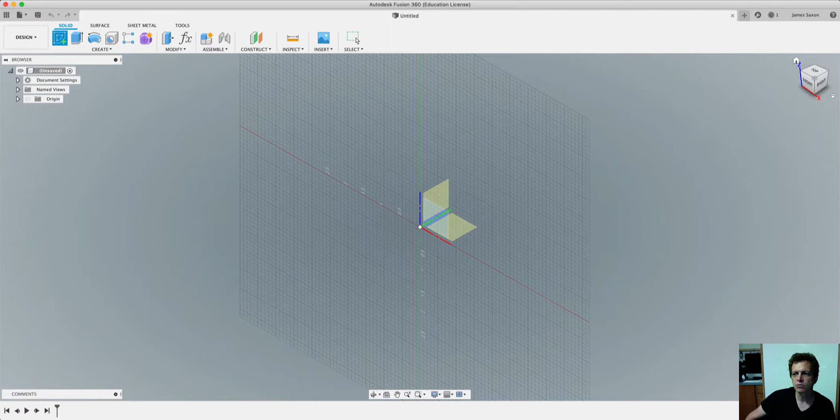So we are going to create a new sketch so that we can get into 2D mode. I'm just going to click on the front here so it's easier to see. We're going to select the XZ plane and we are going to make some points.

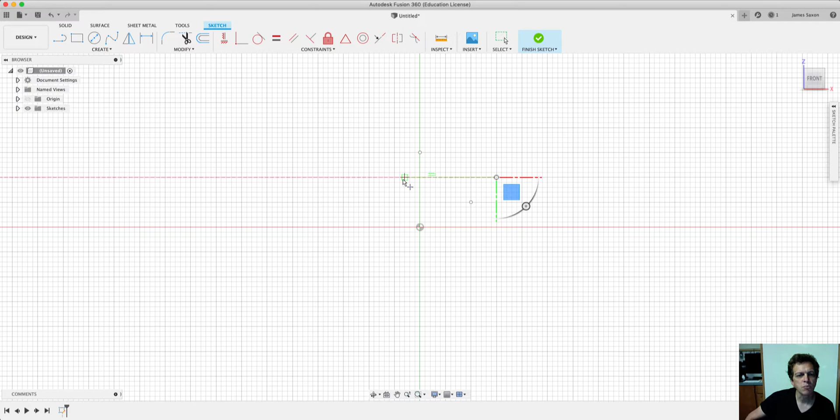I'm going to put a point here, and a point here, and a point here. Make yourself 20 points. Okay, so now that we've made 20 points, we are going to finish the sketch.

And now we're going to make rectangles. Select your rectangle, and we're going to do 10 two-point rectangles. I don't care what size they are, we'll go over that later.

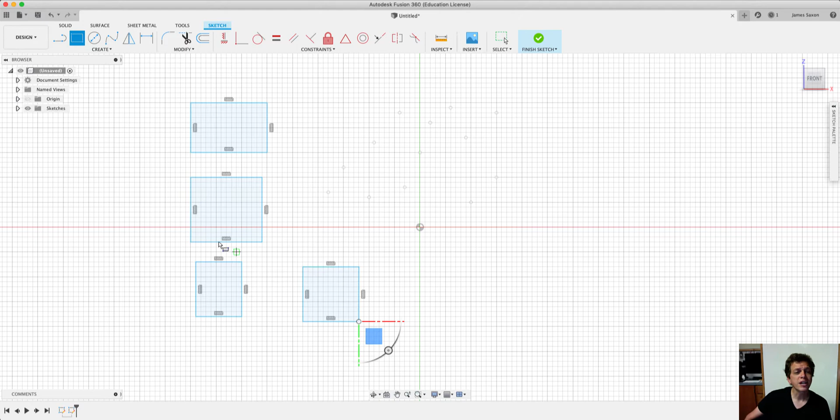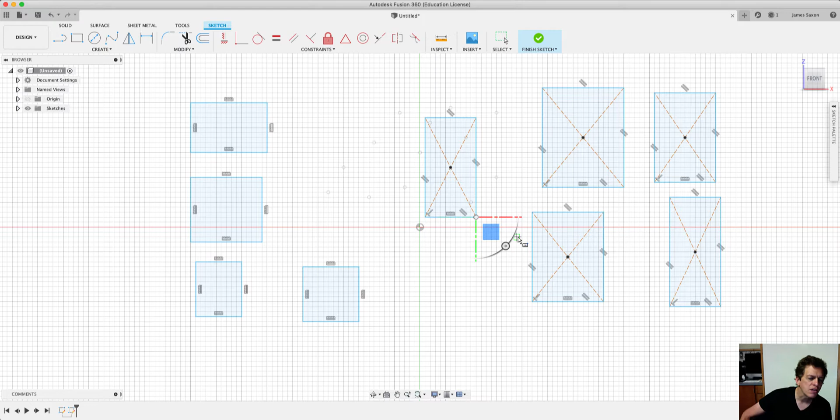Once you've got 10 of these, we are going to switch from two-point rectangles to center rectangles. This will either go really fast or you need the practice. Once you've made 10 of those, we're going to finish the sketch.

I'm going to point you to this area right here, because now we're starting to get some clutter. This is all the same object, same file, same project, but you'll notice we now have two sketches. One of them, if I mouse over it, shows us the rectangles, and the other shows our points, which I can click the eyeball to make them go away. Well, they're not away, they're just not visible.

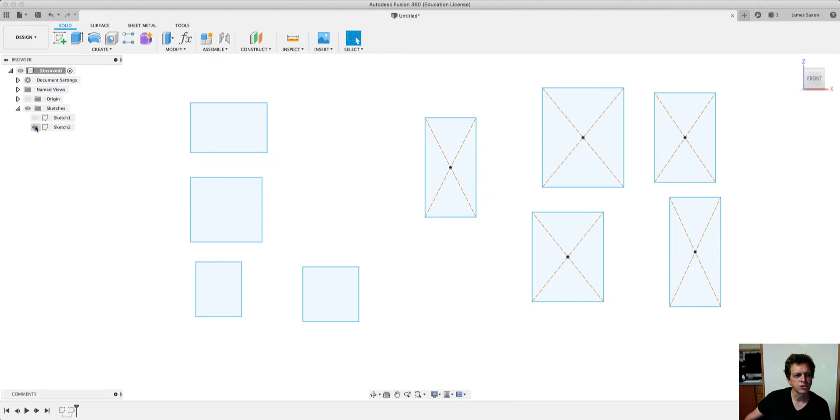Okay, so we're going to create a third sketch, and this one's going to be all about circles. So we're going to create circles. Create sketch, select our drawing plane, create circle. We're going to do center diameter circles. Make 10 of those.

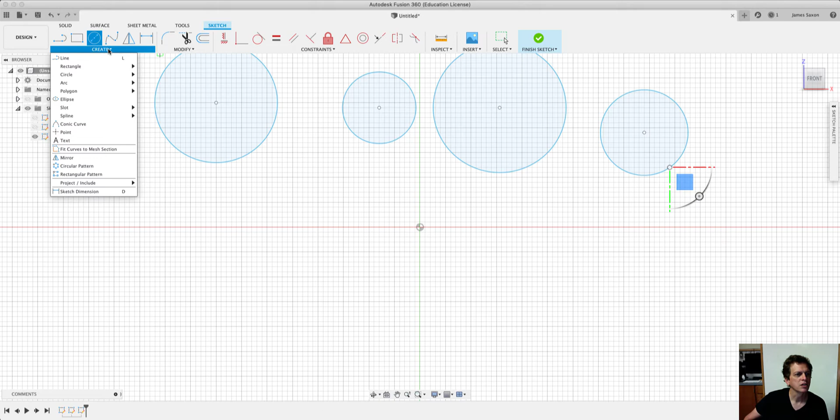Once you've made 10 of those, we are going to make two-point circles, which is basically the same thing but slightly different. Make 10 of those, you get a feel for that. I am just one click on the left mouse, one click left mouse, that's what I've been doing for all of this.

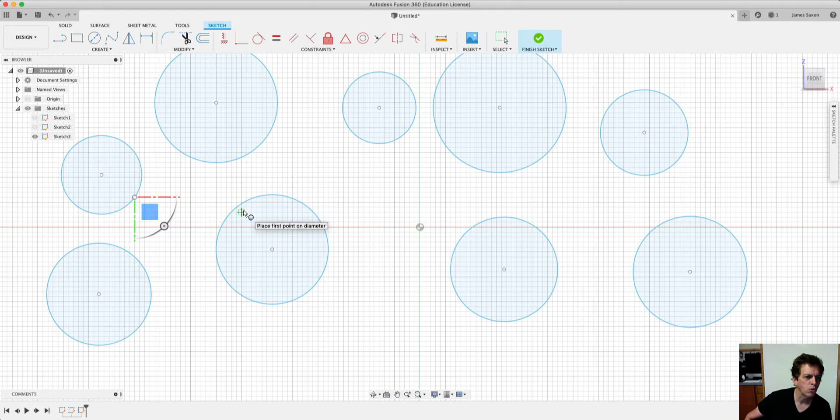Once you have your 20 circles, 10 that are center point and 10 that are two-point, we are going to finish the sketch, and make that no longer visible. And now we're going to work with lines. Lines are a little trickier.

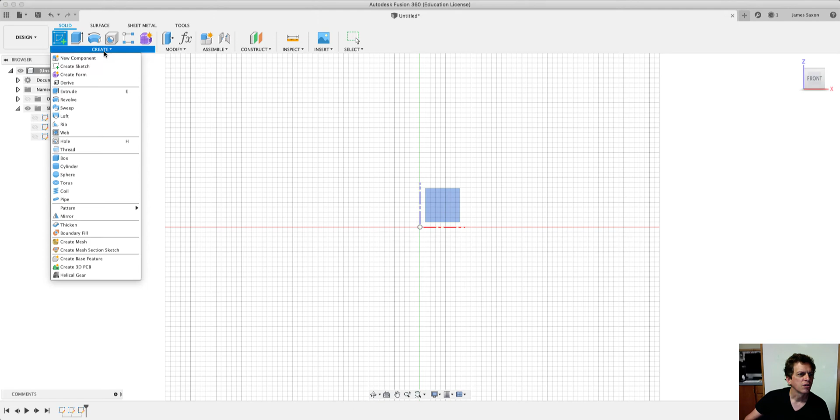So, create sketch, select your plane, and then we're going to create a line. First thing I'd like you to do is 10 just single lines with nothing else attached. So one click, move over, one click, and then we are going to hit OK. And now we have a line. We're going to do that again, and hit OK.

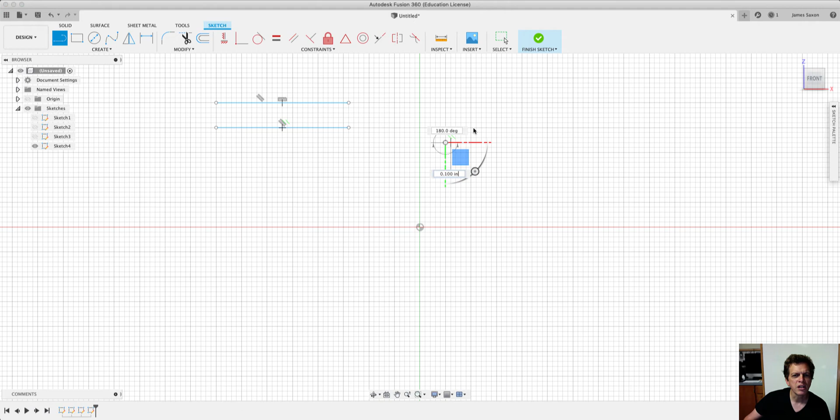And we're going to move over here, and let's do a few at an angle. Hit OK. Hit OK. Once you've done 10 like that, what I'd like you to do, place the first point.

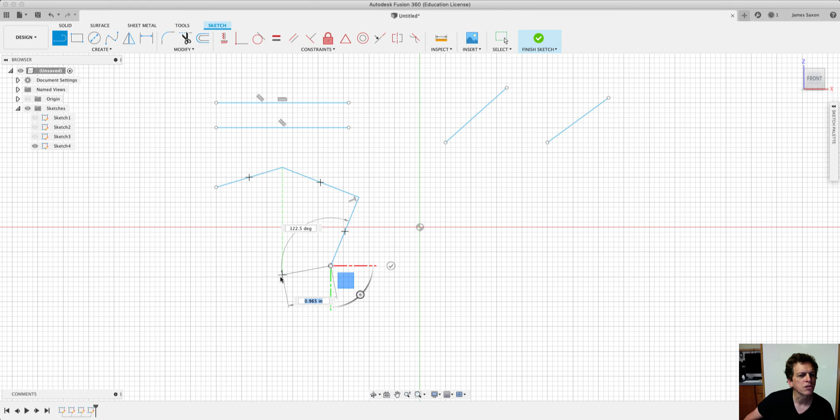Now we're going to make some hexagons. So you make a point, point, single click, single click, single click. If I sealed that, that's 5 points, that's a pentagon. One more makes a hexagon.

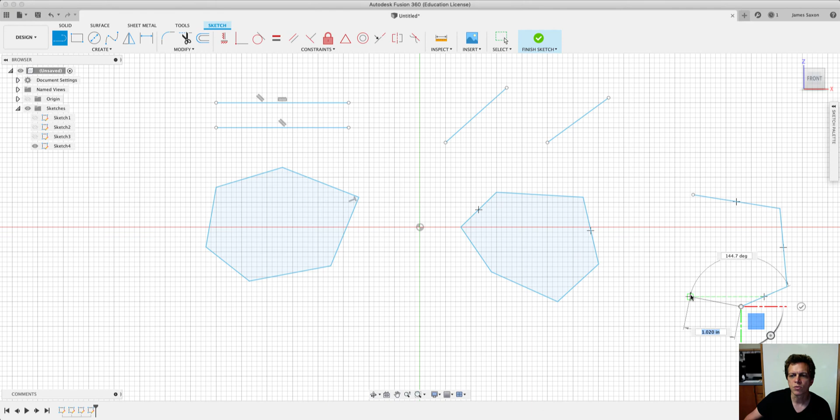Don't mind what the angles are, this is just to get you used to the clicking. Okay, I'd like 10 of those. And I'm going to use the mouse wheel back up a little bit so I can find a clear spot. I'm going to click and drag the center mouse so I have another spot to work with. I'm going to zoom in.

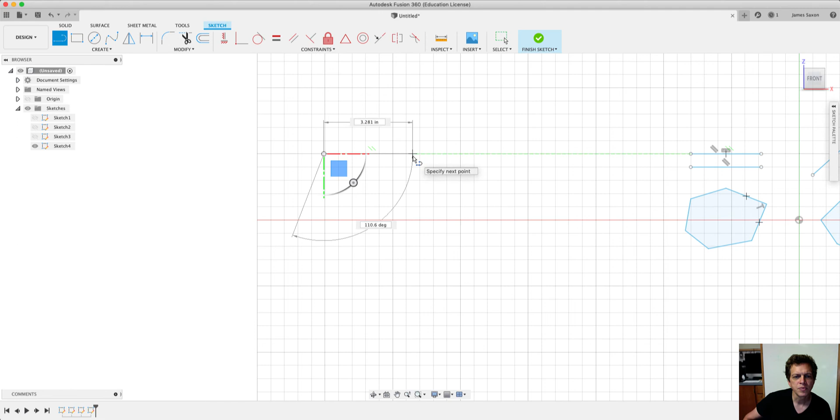And now what we're going to do is we're going to do a straight line connected to a curved line, connected to a straight line, connected to a curved line, straight line, curved line, straight line, curved line.

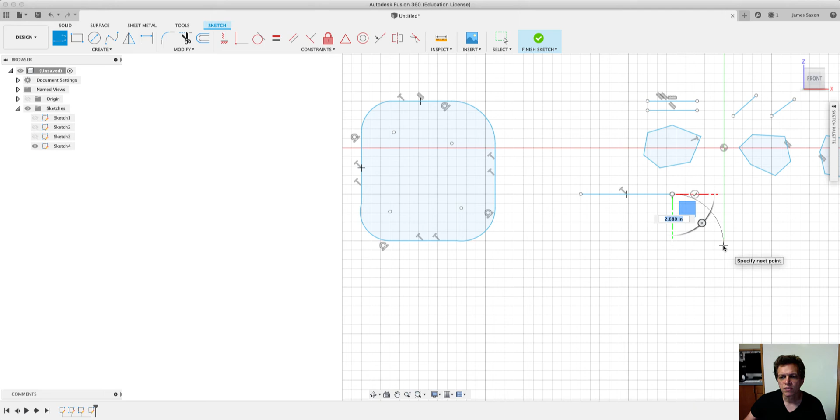Okay, so there's two ways to do this. I talked about this in the earlier video, but: left click, move the mouse, and now I'm going to click and hold and make the curve. Let go, click for a straight line.

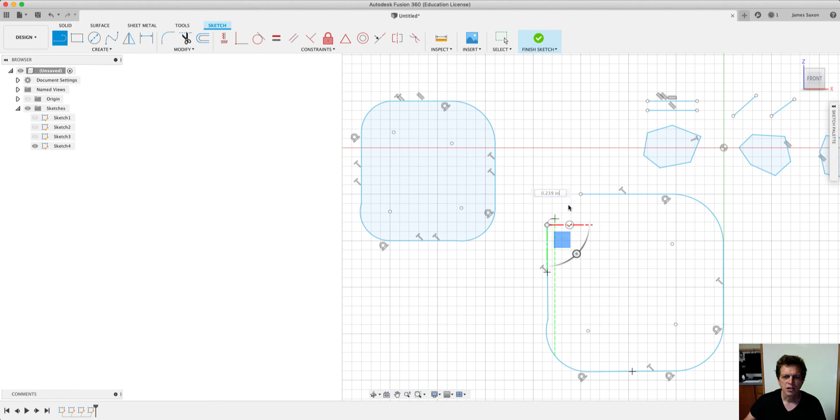Now if I clicked and let go, I can still go back to this point, click and hold to make a curve. Come over, click and hold, make a line. It's faster just to click and hold and then come over. Click and hold, come over. And then make 10 of those.

Once you have those, we're going to finish the sketch, and make that sketch not visible. We are going to create a sketch. Center wheel, click, drag over for a pan, mouse wheel to zoom. We're going to select our front plane.

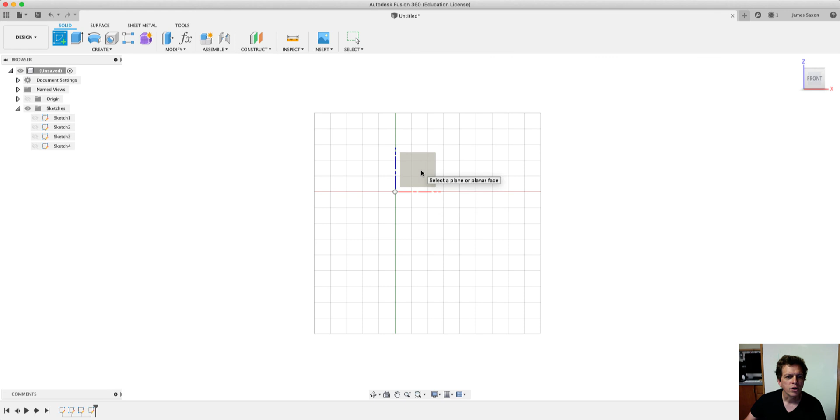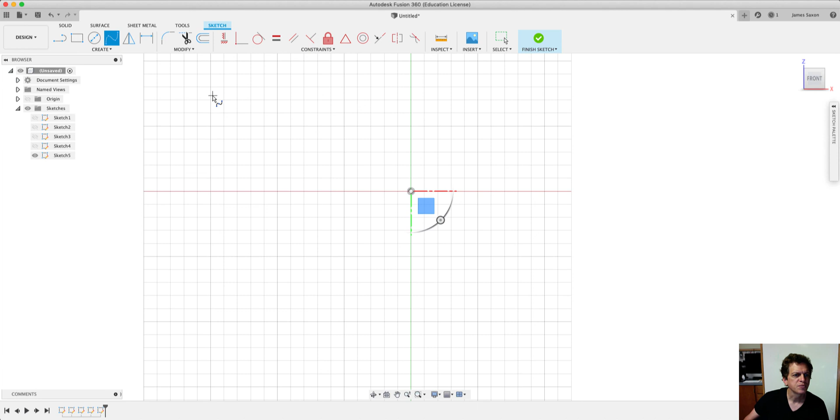And now we are going to do some splines. Create spline, and we're going to use a fit point spline. This is quite simple: just click, click, click, click, click, click, and finish. Do that 10 times, let's just get that muscle memory going.

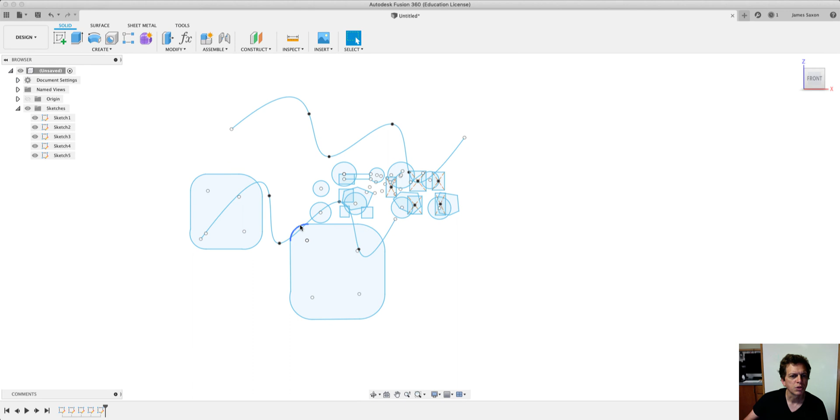Okay, and then once you've done that 10 times, you can finish your sketch, and now you have all of your exercises in one place. If you take a screenshot of that for me, and then we can post that, and I'll be able to mark you off for that.